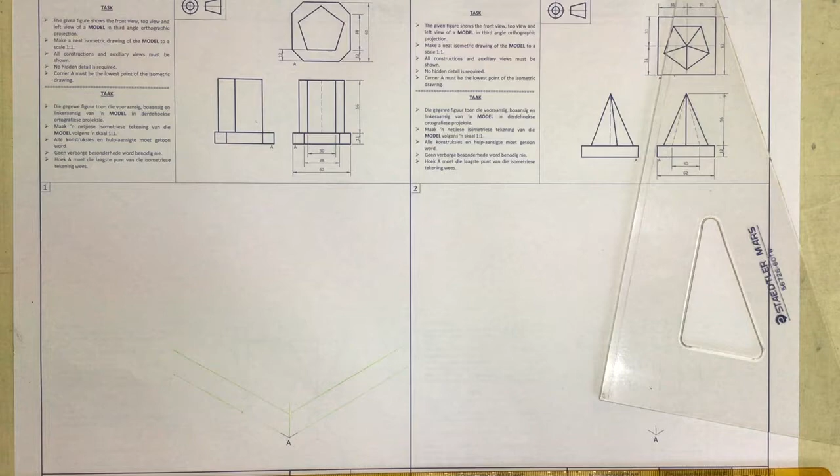We're going to do the isometric drawing of this orthographic projection. You can see that the base is basically a square base with lengths of 62 by 62.

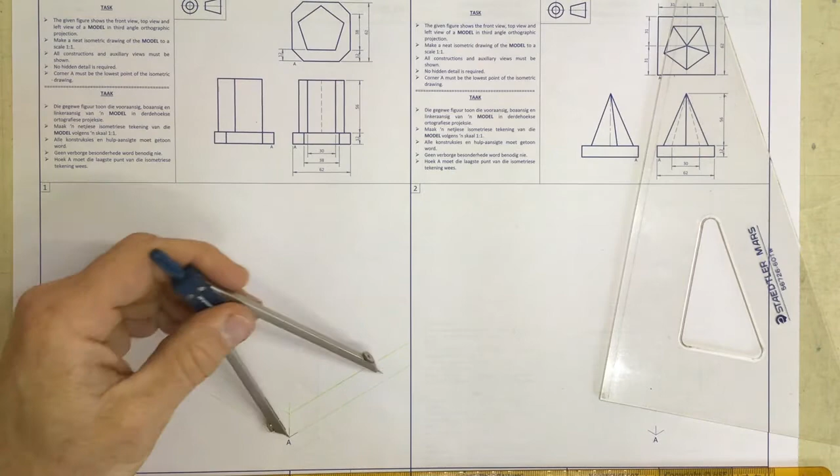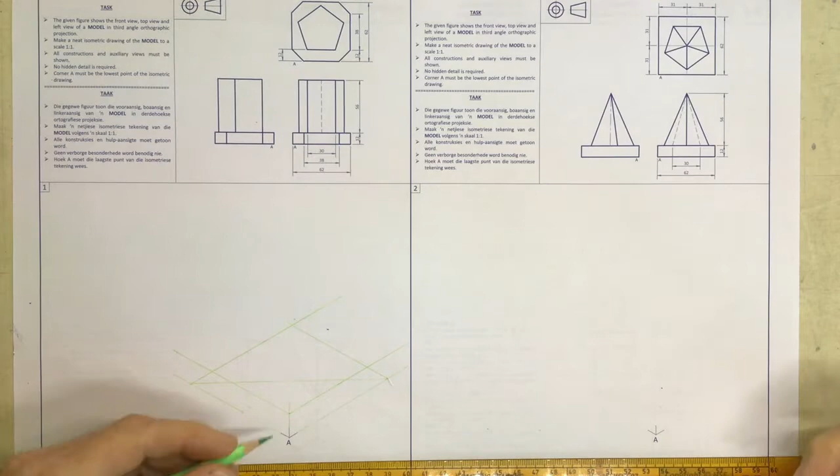To do that, I've drawn some lines going out at 30 degrees, measuring off 62 millimeters. Once I've got that in place, I can take a line going across, and from there draw in the base at the bottom. I have a line going up 12 millimeters, and I can take that across at 30 degrees, a line going up there, a line going back there and there, and I've got that square base in place.

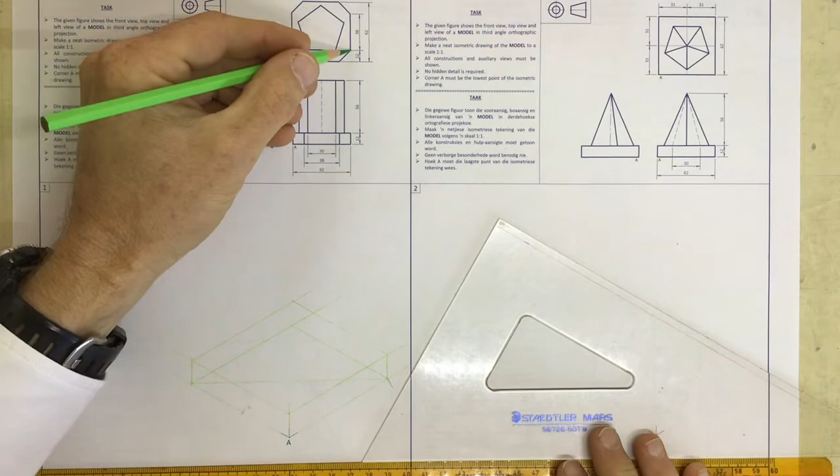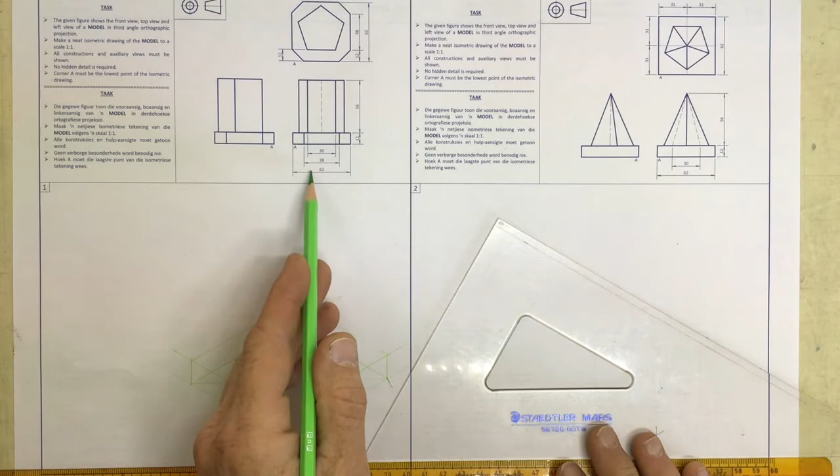You'll see that it is 12 millimeters up, and this corner is 12 millimeters going back there and 12 millimeters going back there. I've also got a 12 millimeter gap going back here. If you do these calculations, 38 millimeters taken away from 62 gives you 24, and you'll end up with 12 millimeters here. In other words, that corner is done at a 45-degree angle.

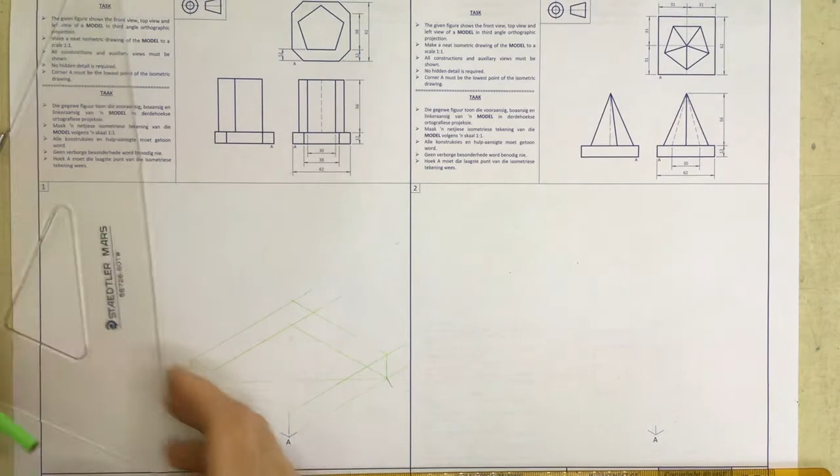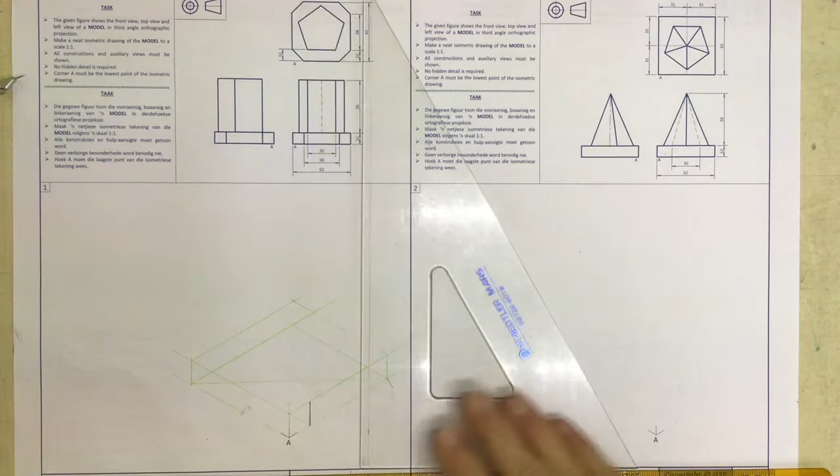If it's a 45-degree angle, note I've got a 12 millimeter line going up here. If I take a line going back at 30 degrees, that distance will be 12 as well, so I don't need to measure 12 going back - I've already got that measurement, and I can draw a line going up. I'll draw that in dark straight away - 12 millimeters going up. I can draw a line going straight across, a line going down, and a line going across, showing that I've just cut off that corner. Can you see that corner that I've cut off? That's what I've just done.

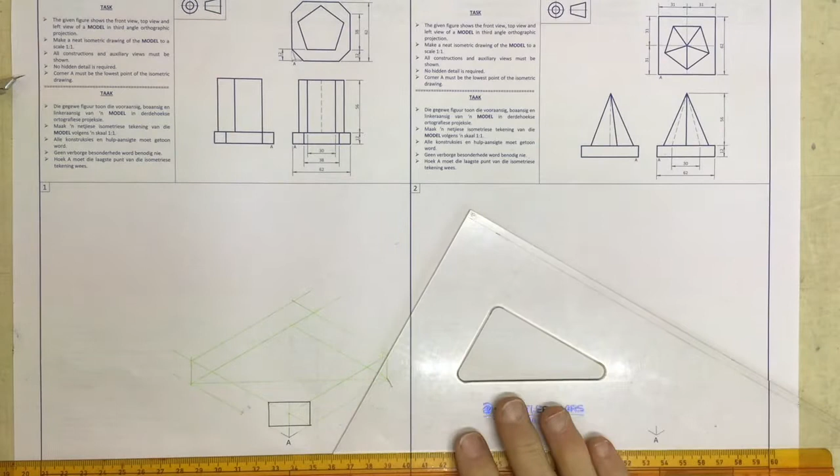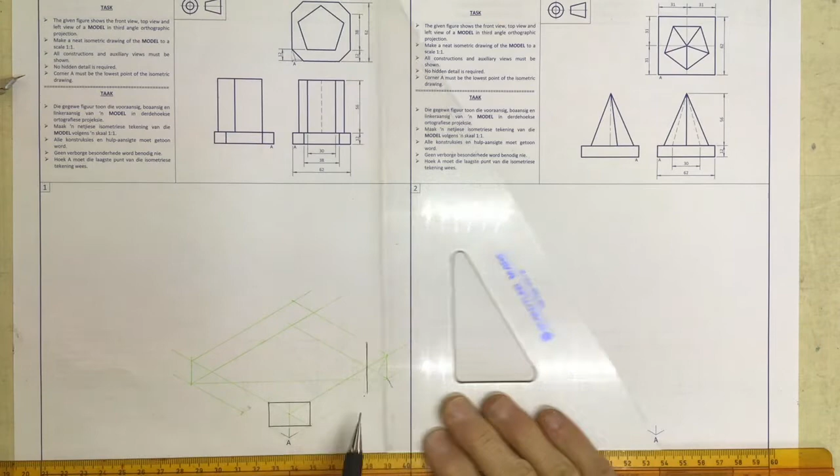Same story over here. I'm going to come across - it's 12 millimeters going up. If I go down at that 60-degree angle, note it's 12 going up there, 12 going across there, and I can draw in a line going straight up and continue straight across, giving me the impression of that corner being cut off as well. Draw these lines going across here and over there.

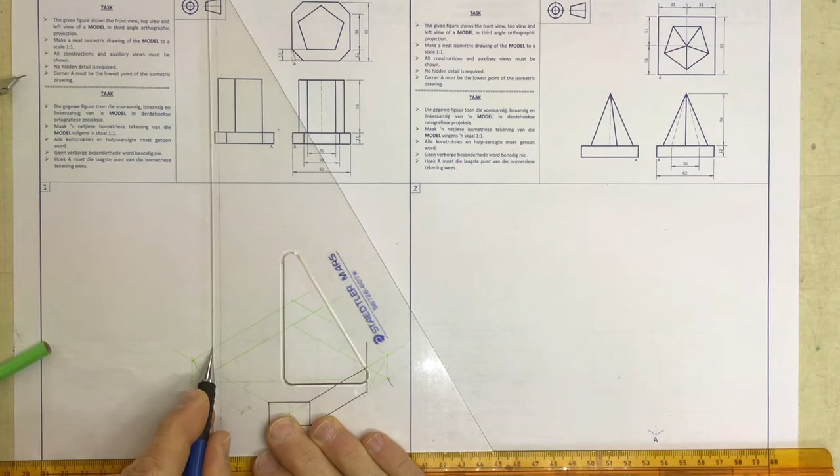Over here again, you can see 12 millimeters going up. Just draw a construction line coming down. Note the 12 millimeters there, 12 millimeters there, and I can draw a line going straight across, giving me the impression that I've cut the corners off at that 45-degree angle. Drawing that in.

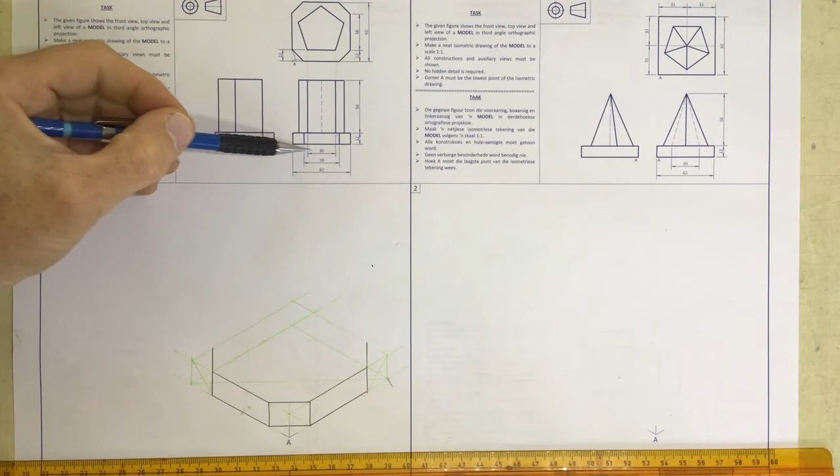The next thing I'm going to look at is getting that pentagon in there. What we need to do is get the side length of the pentagon. It says I've got a side length of 30 millimeters. If you take that up there and there, that's linking up with that 30 over there. Come up here, and I'm going to draw a 30 millimeter line.

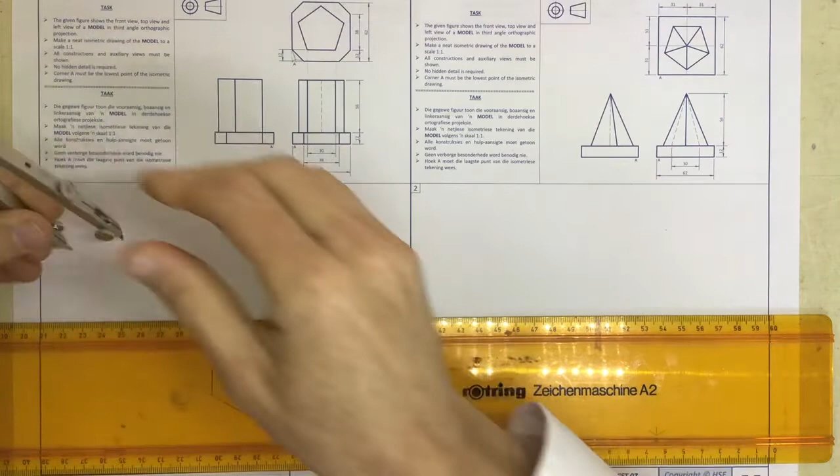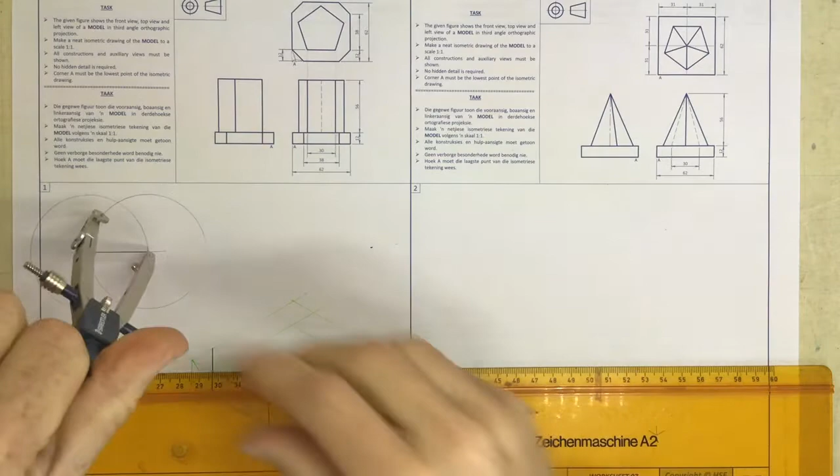Mark that off as 30 millimeters with a pair of compasses. I'm just going to set my pair of compasses to a radius of 30 millimeters. Just mark that off - so that length I've got there is 30 millimeters. You can draw this in dark - you get marks for it, so you may as well draw a circle. Come across here and draw another circle. Go down to the intersection of those two circles and draw another circle.

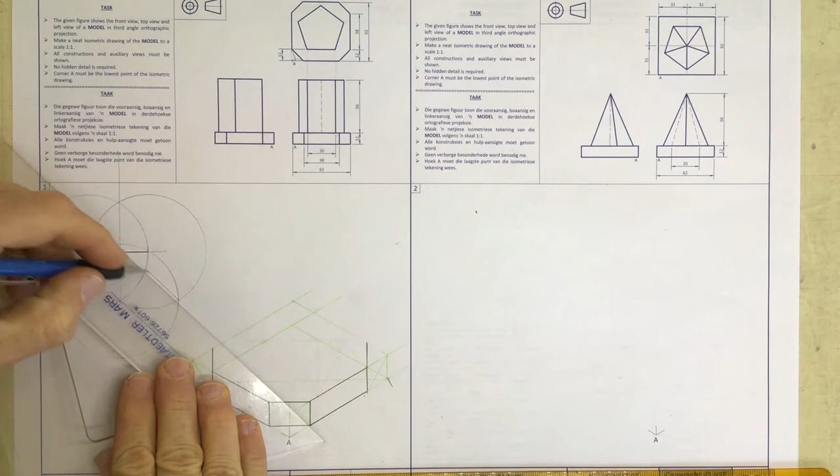Draw a perpendicular bisector going straight up here. Take a line from the intersection of those two circles through where the perpendicular bisector goes through that circle, going up there, go to the intersection of those two circles through where the perpendicular bisector goes through that circle. Take that up to that circle, and that circle. I now have the 108-degree angle that I need for that line and that line over there.

Once I've got that, I can then take that pair of compasses that I originally marked off my 30 millimeters, still set at 30 millimeters, and I can now draw in that line going from there to there, and that line going from there to there.

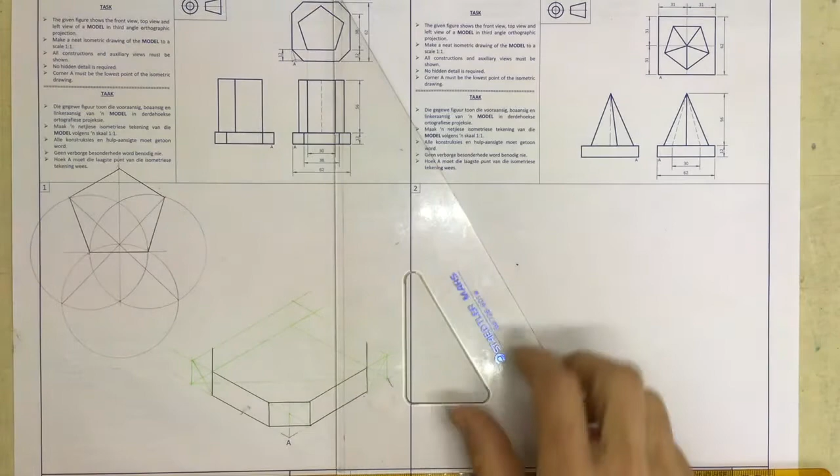Right, once I've got that in place, I need to find the center of this pentagon. The way I do that, I've got the bisected line over there, so I can take that measurement to one of these sides over here, and draw a line going across the center, and I can see that it intersects with that line over there. So there is my center to this pentagon.

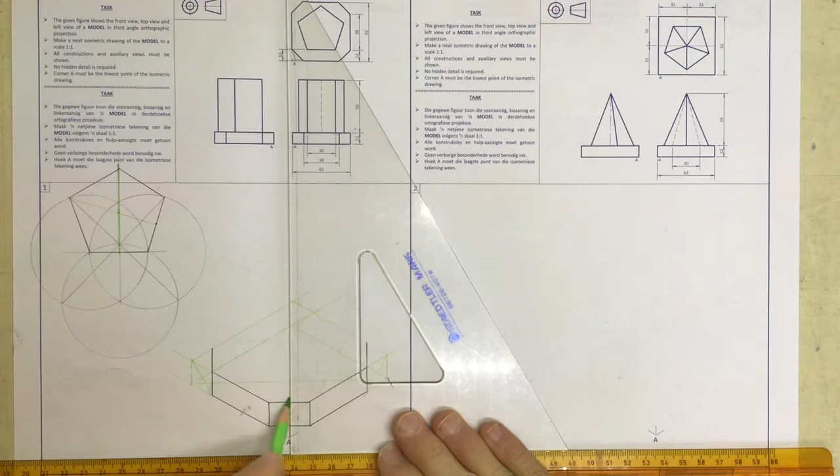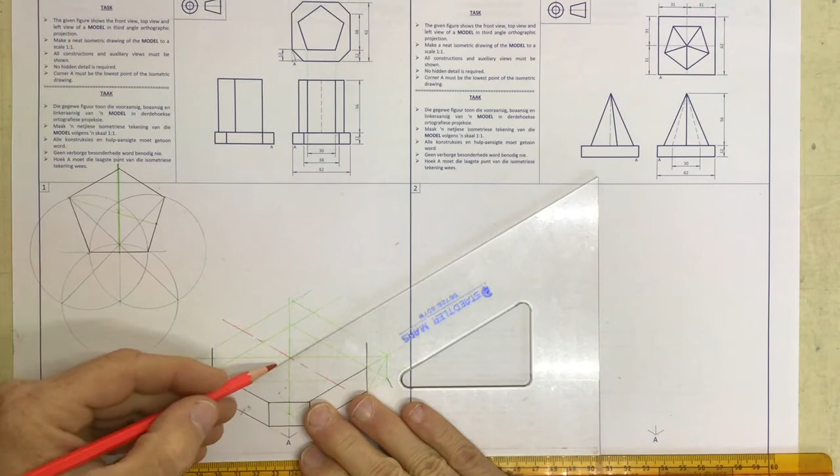I'm just going to draw that in red. Center line, long dash, short dash, long dash, short dash, long dash. Here's another center line, long dash, short dash, long dash, short dash, long dash. And that gives me a center over there of the pentagon. I'm going to go up over here, long dash, short dash, long dash, short dash, long dash, short dash, etc., going up there. And I'm going to measure off the height of this.

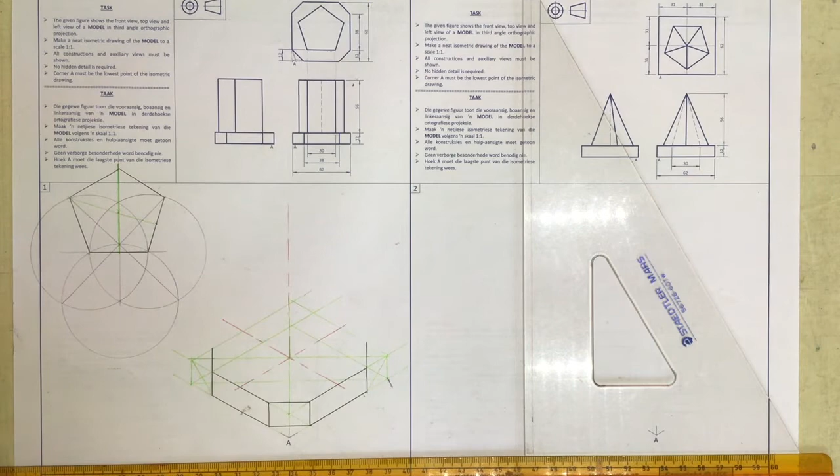It says that it is 56 millimeters in height, so I measure off 56 millimeters carefully. Go to that center over there, mark that 56 off at the top over here. Once I've got that, I'm going to just draw in some construction lines over there.

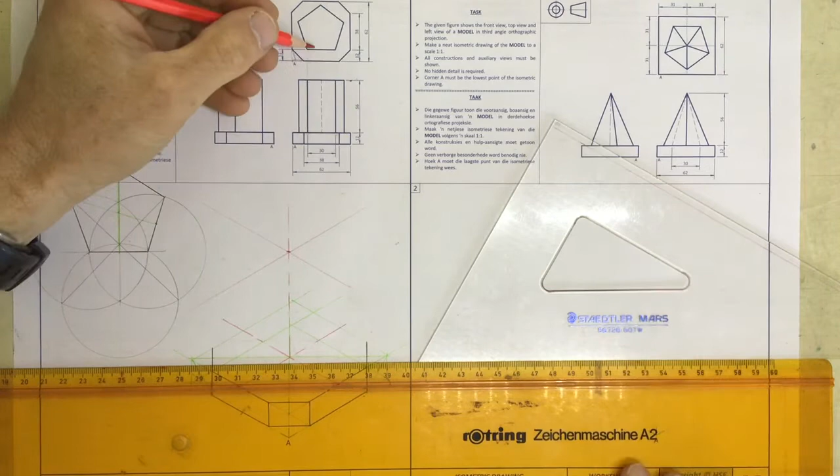And from there, I can then start working out where this pentagon's going to lie. You can see that this side over here is closest to the front of the thing. So I'm going to take this measurement from the center of my pentagon and place it on this line over here and mark that off.

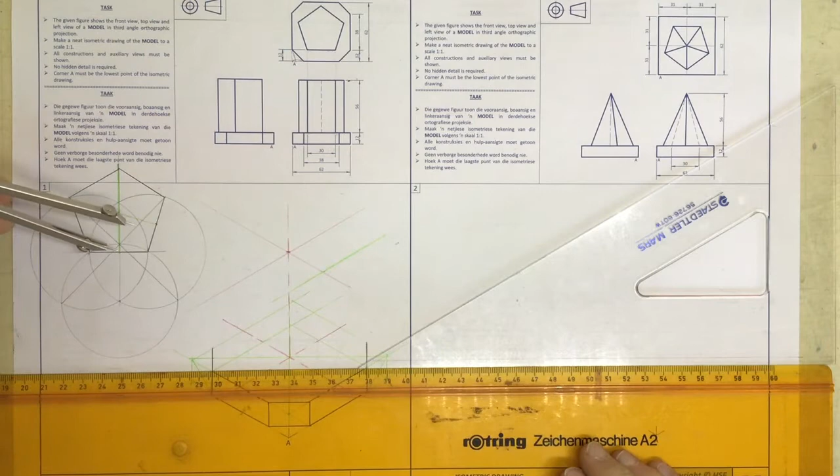And I'm going to then draw in a construction line going over there. So in other words, that length from the center to where that side is, I've placed that over there. I'm now going to take half the length of the side over here, place it over here, mark it off over there, mark it off over there, and I can draw in that side straight away. There it is.

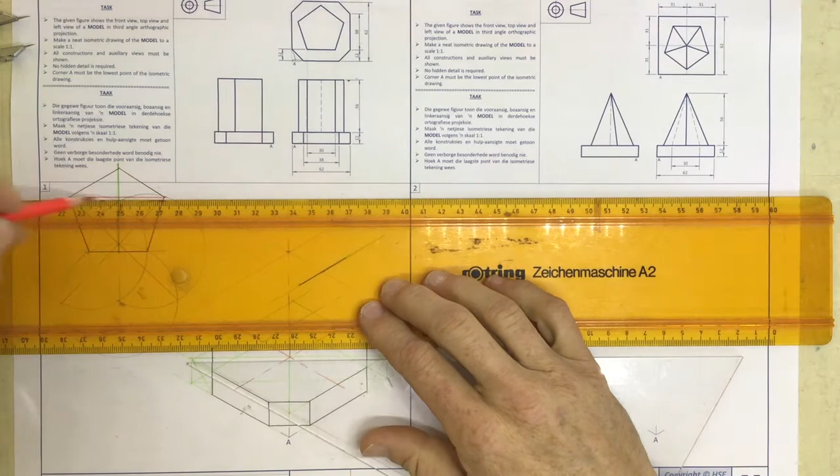Right, once I've got that, I then say, well, where is that point and that point, those two corners over there? I have a length from that side over there going out to there. So I found that point. I'm going to mark off that length and draw a line going across over here.

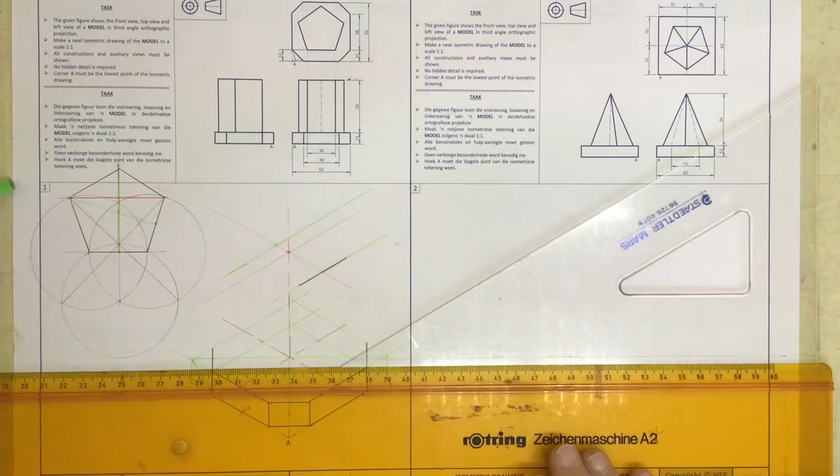Just a construction line going across over there. And I can come back over here and get that length over there, which should be the same as that length over there. Take that across over here, mark that off over there, mark that off over there, and I can now draw in a line which is going to go across like that, and a line that is going to go across like that.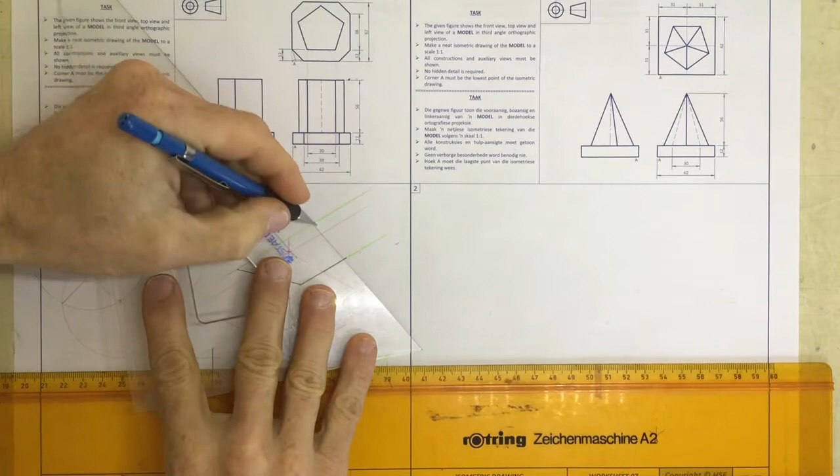Right, I also have this length from there all the way to there. Go to my base over here, mark that off, and I now have the pentagon drawn in on the very top of my isometric view.

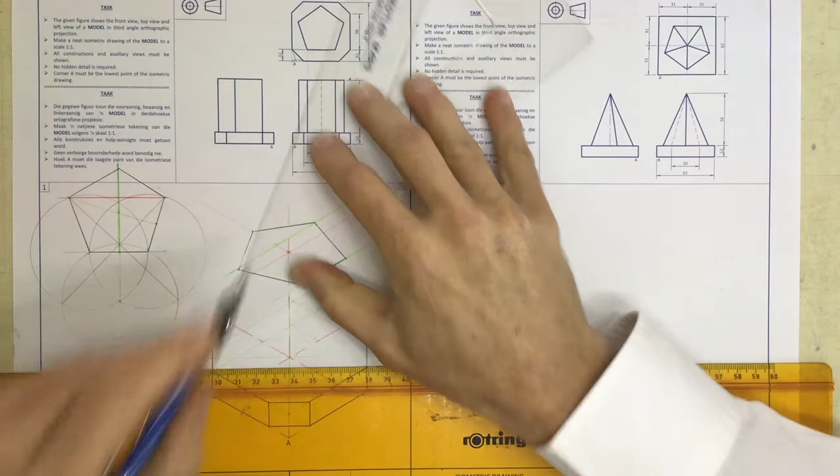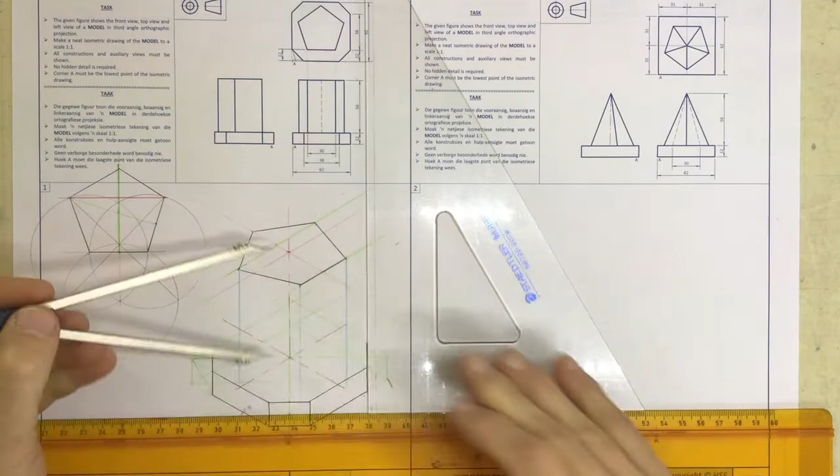Right, once I've got that in place, I know that the distance to the top of this thing was 56. There's my 56. What I'm going to do now is drop lines coming down from the corners over here, from that corner, from that corner, and from that corner, and measure off that 56 from that corner to there, mark that off, from that corner to there, mark that off, from that corner to there, and mark that off, and I can now draw in the base.

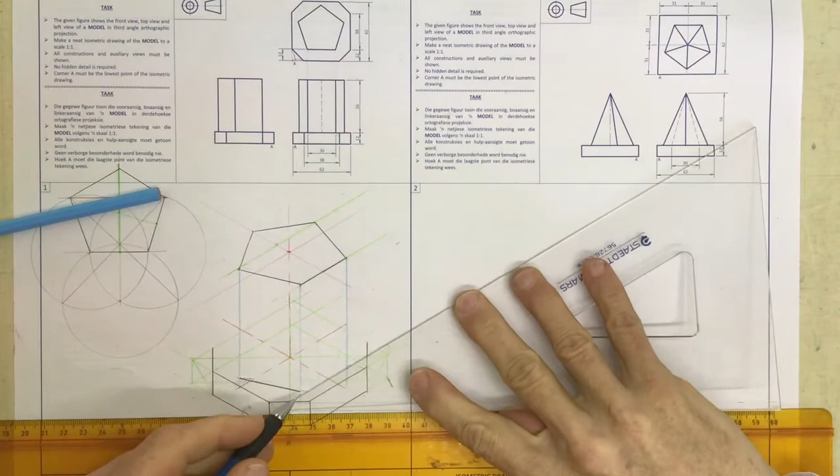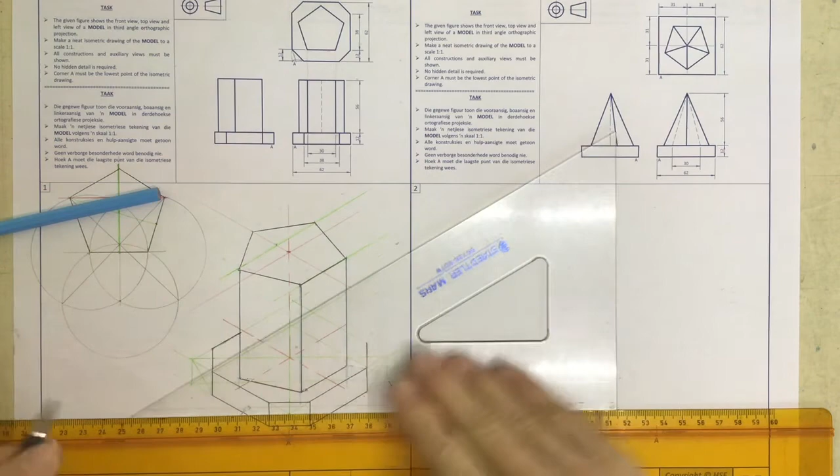Line going across from there to there, a line going across from there to there. And I can draw in these vertical lines coming down from there to there, from there to there, and from there to there. Right, once I've got that, you can see that I need another line traveling back over there, and I need another line traveling back over there. And that's that drawing completed.